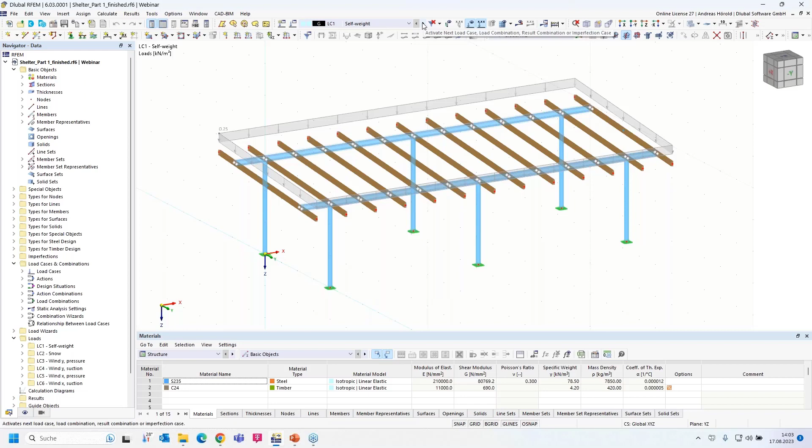Then I open the program. That's the state from the first part of the webinar that we presented last week. I created this model and the different load cases: self-weight, snow, 2 wind load cases in Y direction and 2 wind load cases in X direction. I go back to the base data, what we selected last week.

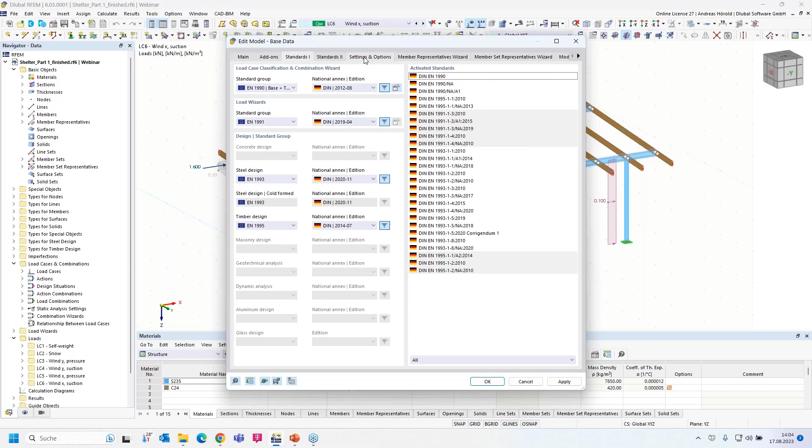I activated the 2 add-ons, one for steel design and one for the timber design. Also, the combination wizards are checked, and I selected the different Eurocode standards with the German National Annex. And under settings and options, I activated the member representatives and the member set representatives.

I would like to design only one representative, for example, and all members that have got the same properties, the same length, for example, same cross-section, are collected in one representative, and I design only one of them. So then in the member representatives wizard, all steel and timber design properties are checked, and the same for the member set representatives. Okay, I'll leave the dialog and I start with applying the imperfections.

On the left side, you can see the navigator data and then the folder imperfections. At first I have to select or create an imperfection case. I can do that with a right click and then new imperfection case. The imperfection case collects the imperfections. After the creation of the imperfection case, I need to create the imperfections. The main advantage of the imperfection case is that you can create a group of imperfection cases. That's, for example, necessary for buckling design according to the GMNIA method.

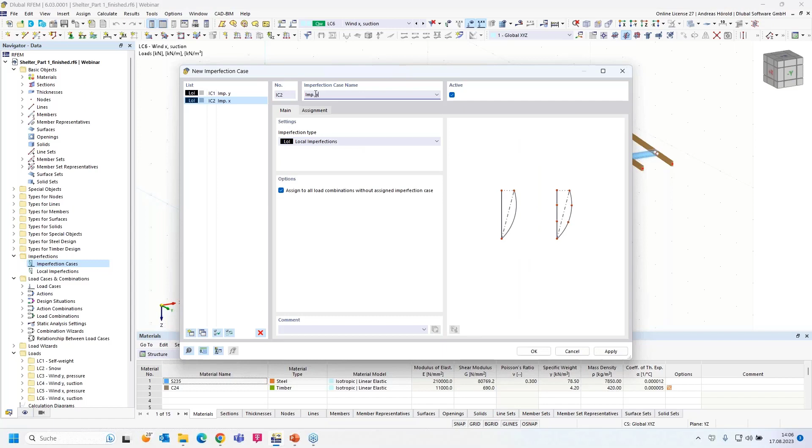So I create the imperfection case imp y and assign this imperfection case to the wind load cases 3 and 4, the two load cases with the same direction y. Then on the bottom left, I check create new imperfection case. I call it imp x and assign the wind load cases in x direction.

And you can see in the combinations, in the background, the combinations are created automatically, and you see only the combinations with wind load cases 5 and 6, and not with load cases 3 and 4 anymore. You can check that here. Same for imperfection y. You can't see any combination with the wind load cases 5 and 6. Only with 3 and 4, and of course the other load cases, load case 1 and load case 2, the snow load case.

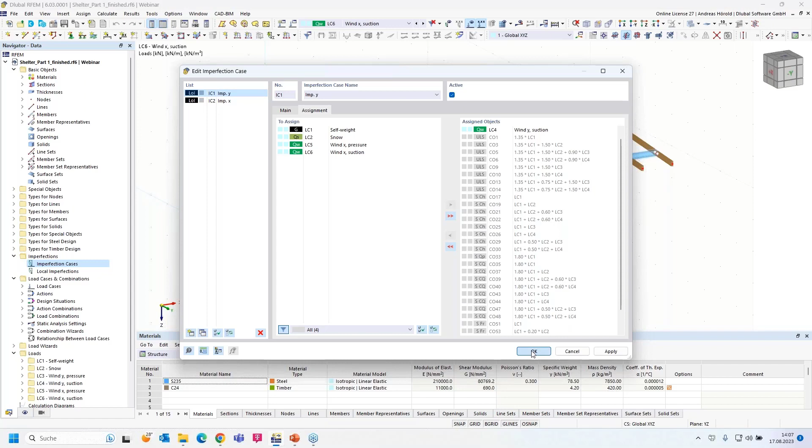Okay, I leave the dialog, and then if I go to the navigator data, I can open the local imperfections, and for example under the folder imp y, I can create a new member imperfection. With a right click on it, I can select new member imperfection. The other way is to go above here and select the button new member imperfection.

So the right imperfection case is selected. I would like to create an initial sway. I would like to assign the initial sway to the steel columns, and I will use for the steel design the equivalent member method in combination with imperfections and calculation according to second order theory. That's sufficient for the design according to the equivalent member method.

Okay, this definition type, Eurocode 3. So the coordinate system is local. Okay, I forgot to show the member axis systems. I select Y. I know that from the test. So then I measure the structure height. Measure. I measure the longer column. Doesn't matter that this column is a little bit shorter.

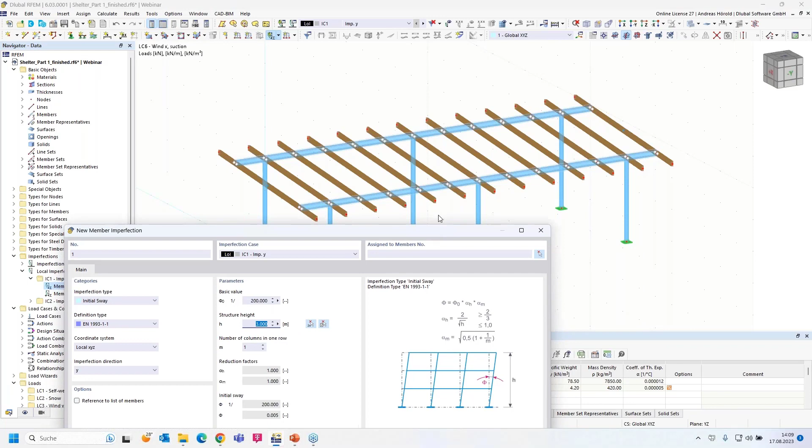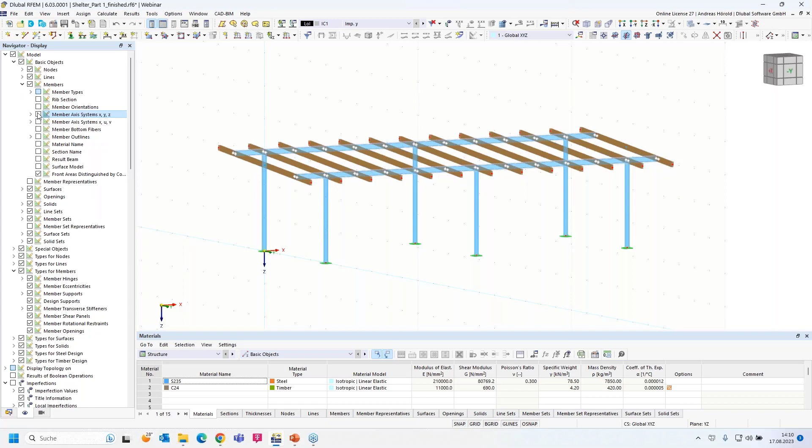2 columns should be in one row. This one and this one. And I can press OK. And I need to select the different... Okay, I must go in the dialog again. But before I do that, I go in the navigator display. And then under members, you can find the member axis system. So now you can see the local member axis system.

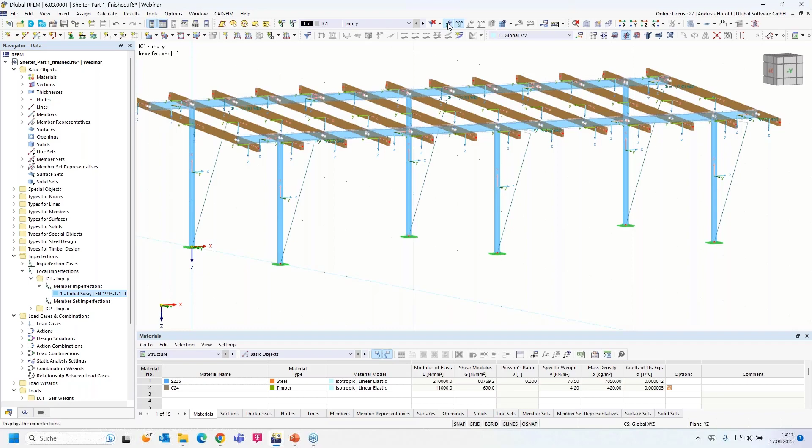And now I turn back to the navigator data, double click on the initial sway, and you can see the local Y direction is the same as the global Y direction. So I assign the different columns. Okay. And I have to select this button above, show imperfections. So the imperfections are created correctly.

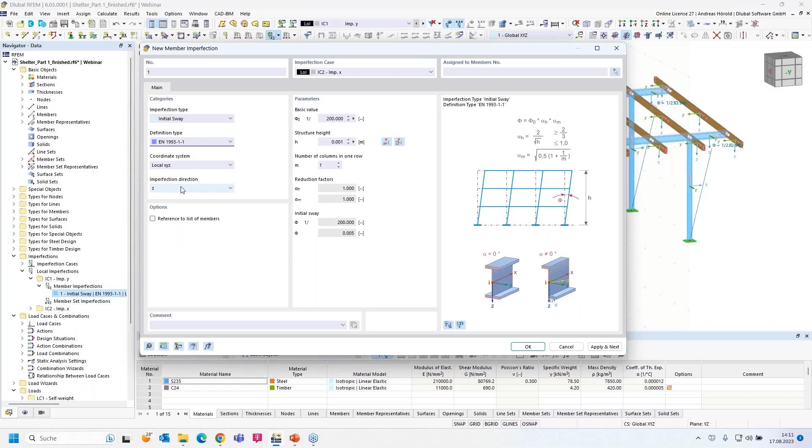So then the next imperfection, new member imperfection. This time I have to select the imperfection case 2, imp x. Again, initial sway according to Eurocode 3. This time imperfection direction Z. You can see this is the local Z direction. It's the same direction as the global X direction. Structure height is 3 and 3 columns in one row. Okay. And I select the different columns. So I select the other imperfection case, and you can see that the imperfections are defined correctly.

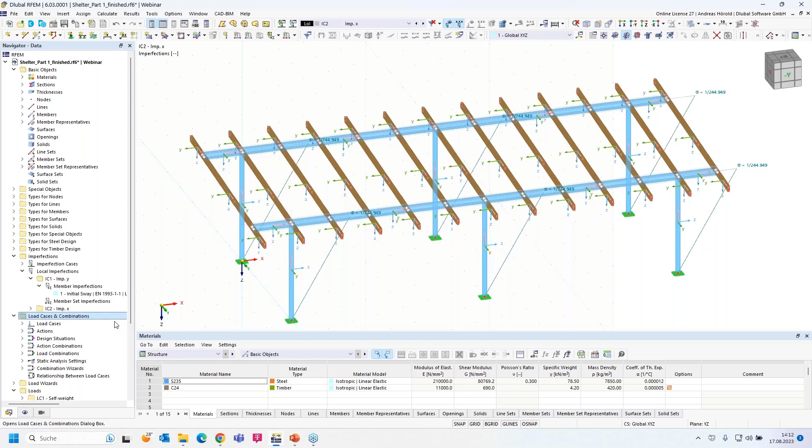Okay, then we can turn to the load cases and combinations. Here on the left side, navigator data, I right click on it and open the load cases and combinations. That's what we defined in the base data, the Eurocode 0 and the German National Annex, and of course the base and timber, because parts of the construction are from timber. And when I edit the parameters of the National Annex, I can see the KDEF factor. It's the service class 2 and it's 0.8.

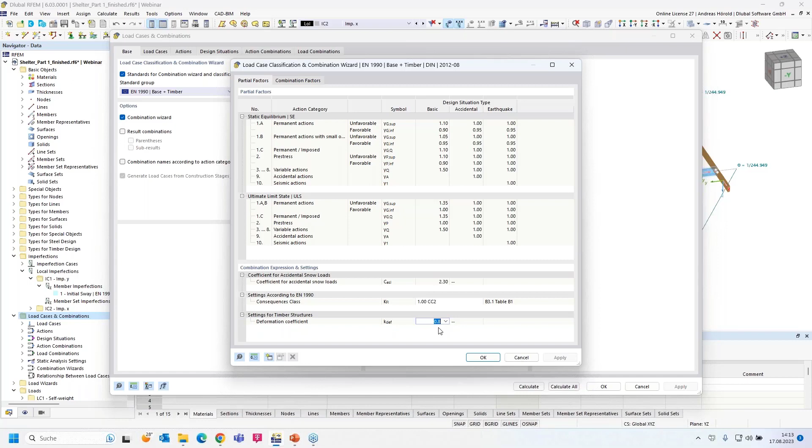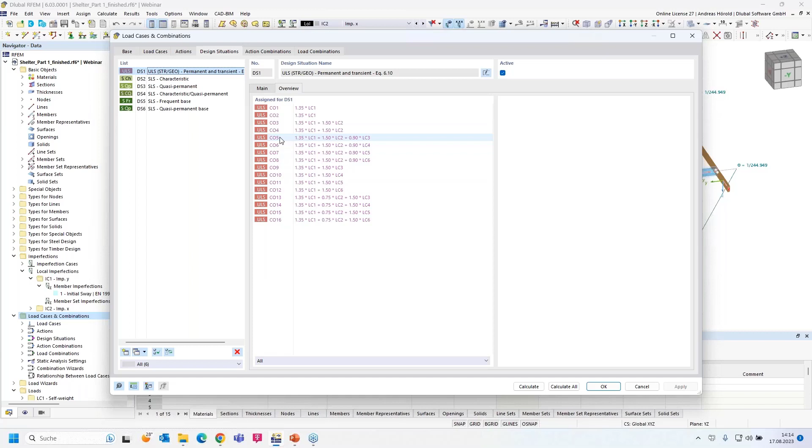Okay. So the combination wizard is activated. Those are our load cases in the next dialog. Then the actions. For the wind load cases, it's important that the alternative action type is activated. It's done automatically. You can see the 4 different wind load cases, so that we don't have more than one wind load case in one load combination. Then the design situations, 1 for the ultimate limit state design and 5 for the serviceability limit state design. If you click on one of them, you can go to the overview and see the different assigned load combinations.

And in this dialog, you activate the add-ons. You can also assign concrete design. We activate, for example, for the ultimate limit state design, the steel design and timber design add-on. Let's go to the action combinations. And the important thing, the load combinations for ultimate limit state design and serviceability limit state design. At the moment, we have got 60 load combinations. Let's go back to the design situations. Of course, we will activate the steel and timber design for the ultimate limit state design. For design situation number 2, the serviceability limit state design characteristic, we also activate steel design and timber design. That's all for the steel design.

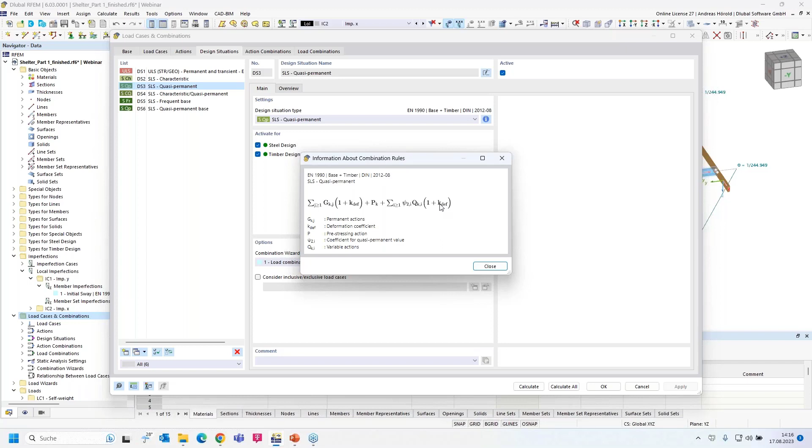And we check if we need this serviceability limit state design quasi-permanent for the timber design. I go to the info button, and in the combination rules you can see the KDEF factor, which is quite important for the timber combinations. That's why we need this design situation for the timber design. You can leave the dialog, uncheck the steel design. We check the same for design situation number 4, information, and we can see the KDEF factor again. That's why we need it also for the timber design.

And we don't need it for the frequent base. And you can't see the kdef factor here. So that's why I delete these 2 design situations. Okay. So again, this design situation for both, design situation 3 for timber design, and 4 also for timber design. So with the Shift key, I select the 3 serviceability limit state design situations and check the geometrical linear analysis. And for the ultimate limit state design, the second order theory. Okay.

So now we go back to the load combinations, and you can see there are 45 load combinations. Let me check if all is correct. Yeah, all should be correct. So that's all for the combinations. I go back to the navigator data. I deselect the member axis systems, but I show the member representatives and the member set representatives. I hope you can see it.

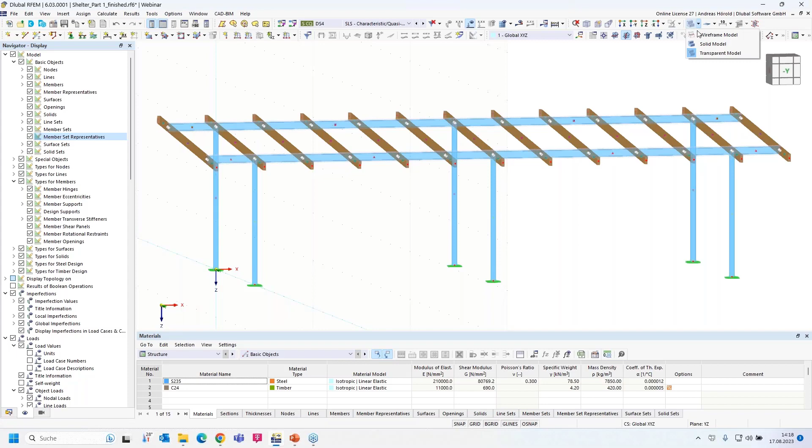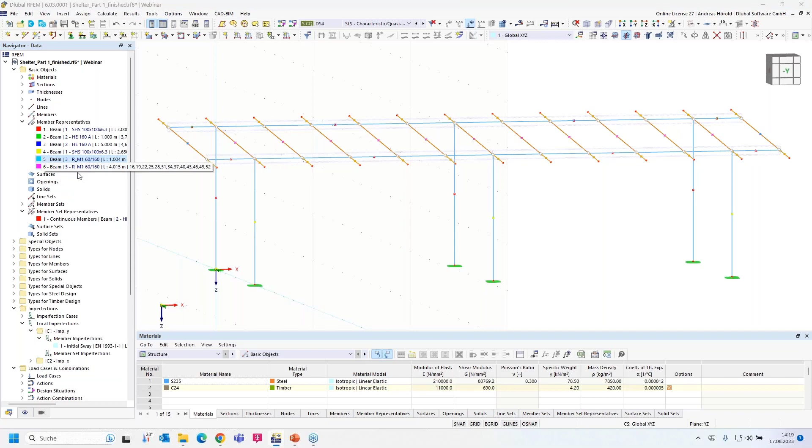I go right above to the wireframe model button. You can see these 3 columns are in the same group. It's the same member representative, and that's member representative number 4. You can see that in the different color of the points in the middle of the member. So I go left on the bottom in the navigator data to the member representatives and the member set representatives. So that's the timber representatives. You can see that's the cantilever beam, and that's the inner beam here. And I start with this inner beam made of timber.

Okay, then I go to the design type. You can see the service class number 1. That's not correct. I added the service class with that button and change the service class to moist. You can see this preview image. That's what is valid for our structure. You can see the timber structure on the outside, but there's a roof over the timber structure. That's the case for our structure.

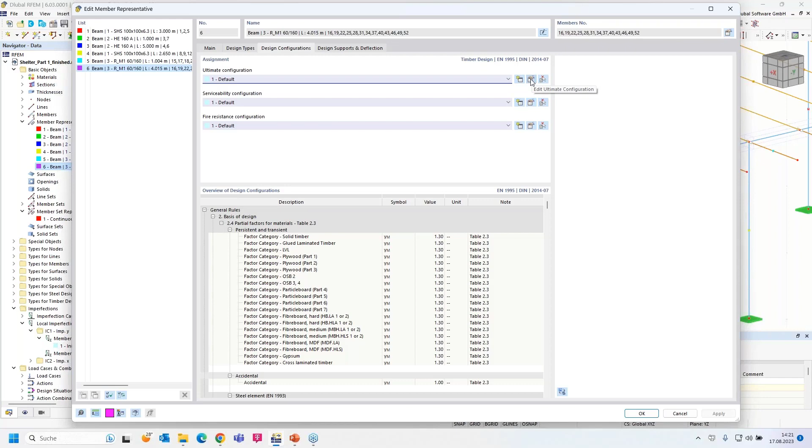Okay. I don't define any effective lengths. We don't do stability analysis for the timber beams. I assume that I've got nailed formwork of timber on the upper side of the purlins, or a stiff plate nailed on the upper side of the purlins. And it should be quite stiff. So I go to the design situation, ultimate configuration, select edit ultimate configuration, and I uncheck the stability analysis. Okay, and we leave the standard parameters. I apply with OK.

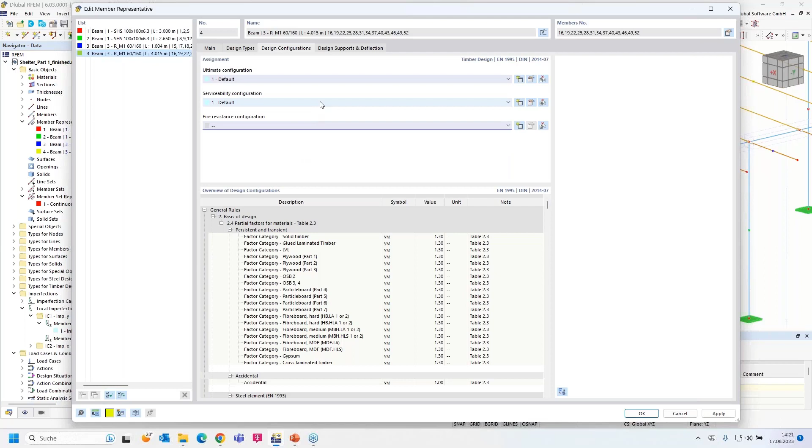So I go back to the design situation and serviceability configuration. I press the edit button, and I leave the parameters from the standard. Okay, and we don't perform any fire resistance design. So the next dialog is the design supports and deflection. Now I have to enter a support at the member start and the member end. I press this button, create new design support for member start. The type is timber.

Direct support. The support length is 160 millimeters. That's the width of the steel beam, the HEA 160. The support width is equal to the width of the timber member. If you change the width of the timber member later, it will be changed automatically. It's an inner support. We do the design only one time for this member and not for the cantilever beam. And we say it's an inner support, so the program uses the complete width of the support. In our case, the steel member.

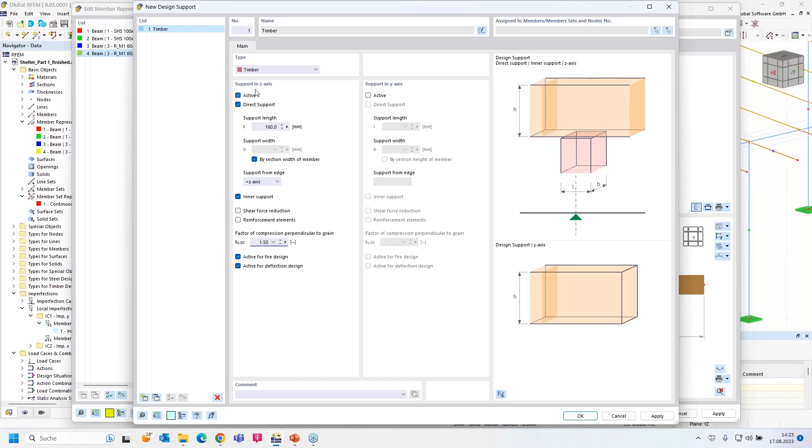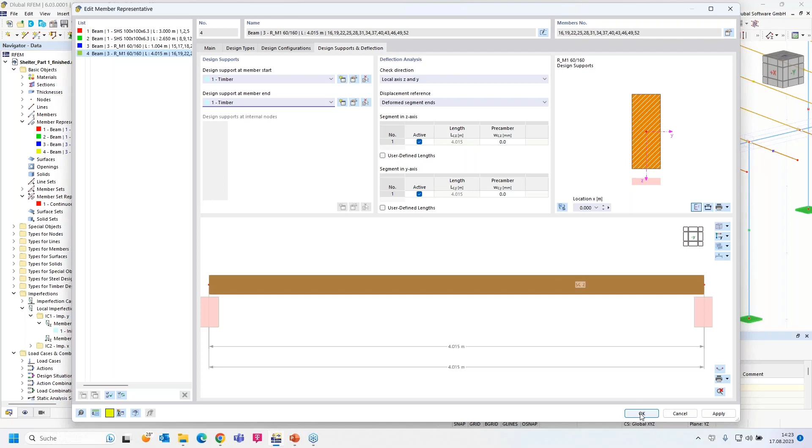So I need to define the factor of compression. I select 1.5 softwood discrete supports. Okay. So it's only supported in Z direction. So the design support should be at the member start and the member end. Okay, that should be all for the timber design, but I check beam number 3, the cantilever beam. Design types, the same service class, 2, the same design configurations, no fire resistance design, and we don't need to define any support. We design the support with the member representative 4. Okay, that's all for timber.

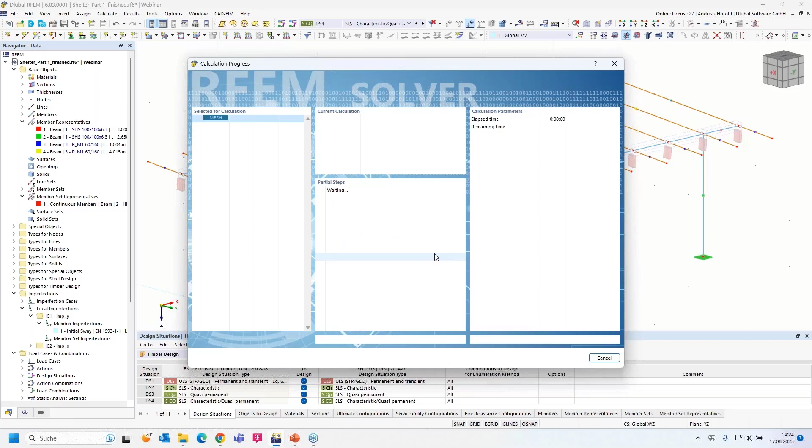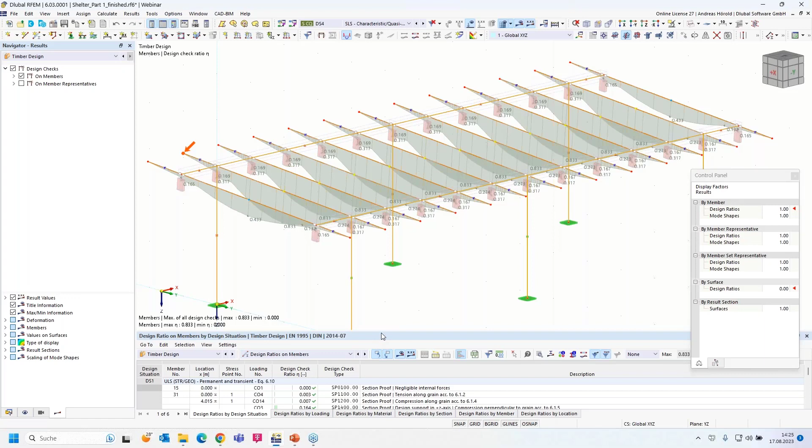I can run the calculation here in the table on the bottom, timber design. And I press this button, show results. And this runs the calculation. The program calculates all combinations simultaneously; it's a new feature in RFEM 6, a multi-core calculation. My computer has more than one core. That's why the combinations are calculated in parallel. So I show the design ratio on members. You can see the different design ratios.

68% for the serviceability limit state design. No, the maximum is 83 for the serviceability limit state design. If you double click on the line, a new table is opened. You can see the design formulas, also the equations from the standard.

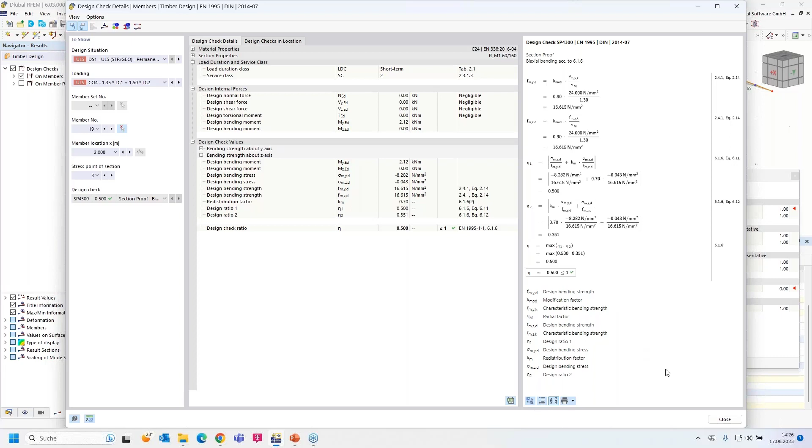Let me select another one, maybe a section proof, for example, this. I can double click on the line, or I can use that button, design check details, and you can see the equations from the standard. Complete design. And you can print it directly with that button, print graphics to printout report. A very nice new feature of RFEM 6, often wished from our customers, and we implemented it for RFEM 6.

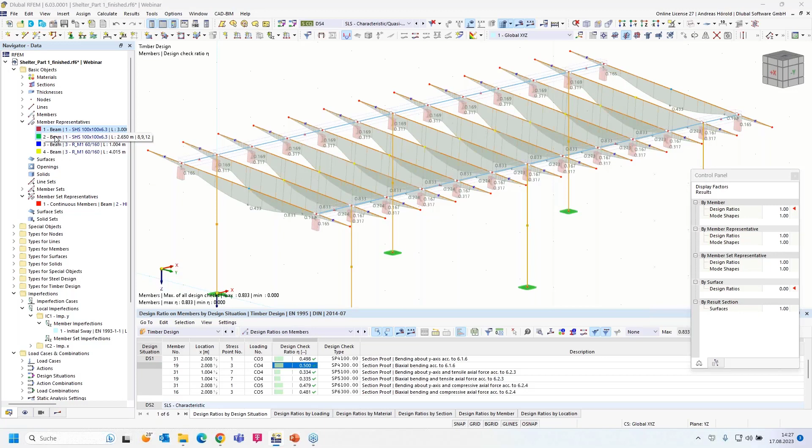So, okay, that's all for the timber design. We continue with the steel design. I select the member representatives 1 and 2 and do a right click, edit. Those are the columns. You can see them on the cross section. Design types. I select the effective lengths. As I already said, I will use the equivalent member method. That's why I have to create effective lengths.

Another way would be to use the general design method. Then you need to define boundary conditions. So I create a new effective length. All the flexural buckling and torsional buckling should be designed. I check all, and I leave the member lengths by 1. The effective length factors, SK, should be equal to the member lengths. Because I assigned imperfections and used the second order theory for the ultimate limit state design, that's sufficient if I leave the member lengths to 1. Okay.

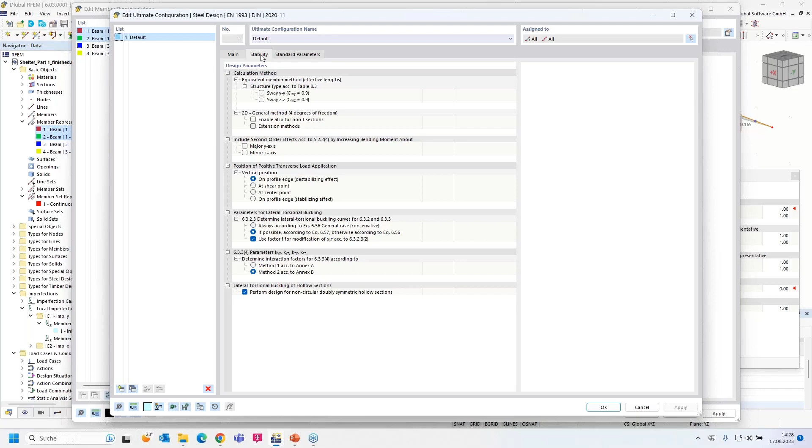So then design configuration, default. I go to the edit button. I perform a stability design and I leave all checks as they are. Apply with OK. Serviceability configurations, let me check it with the edit button. And I leave the standard parameters as they are. Okay. And I don't do a fire resistance design.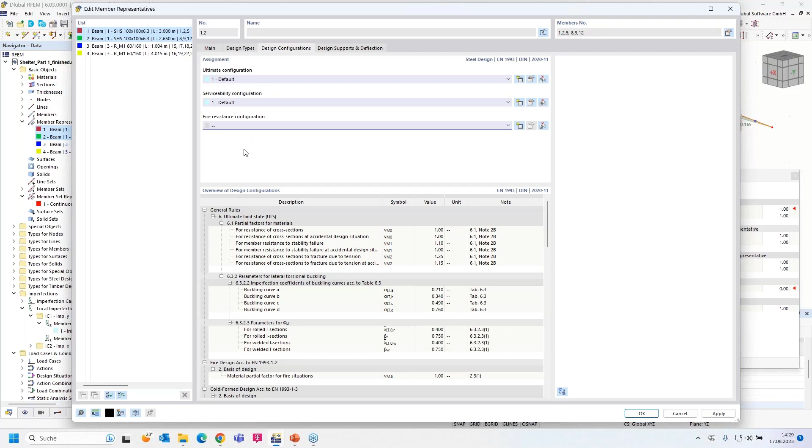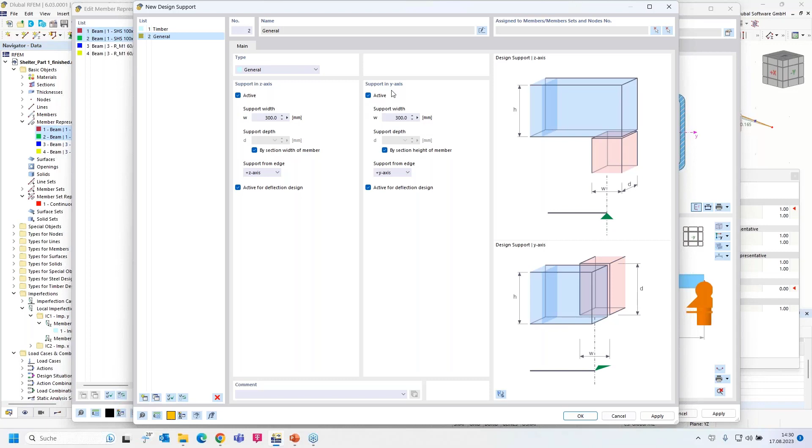So then design supports. I have to create a design support at the member start. I see it as a cantilever column, which is rigidly supported at the member start. So new design support, general support, and I leave all parameters as they are, but I select it for both directions, for the Z axis and the local Y axis. Okay, but only at the member start. You can see that in the preview. So that's all for the member representatives. You can leave the dialog.

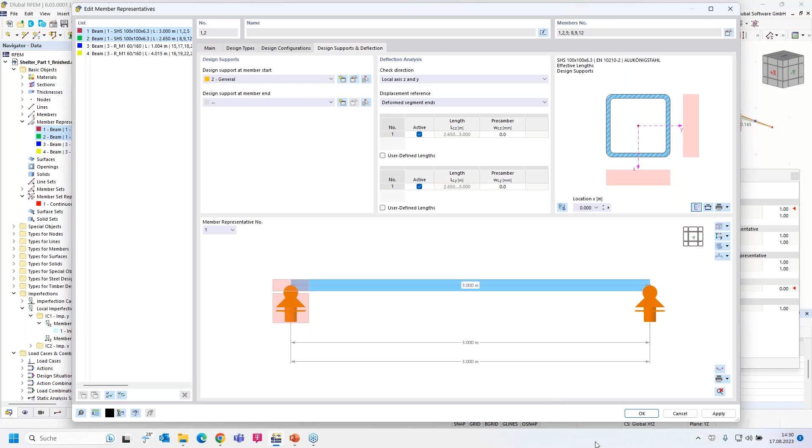All results are deleted. And I continue. I deselect the results. So I continue with the member set representatives. These two sets of members are contained. I double click on it, and I can see there are no design tabs here. I leave the dialog and I select the member sets, or they are selected. I double click on one and I have to set this check here, design properties. Now it would be also possible to enter here the design types, the design configurations, and so on. But I will use the member set representatives. I'll leave the dialog.

Double click on it. Select the design types. I will use the equivalent member method again. Create a new effective length. Nodal supports and effective lengths. So, with this button, I select one set of members. And I can see there are only 3 inner nodes. And that's not correct. I leave the dialog. Okay, I can see only 3 nodes. We check why.

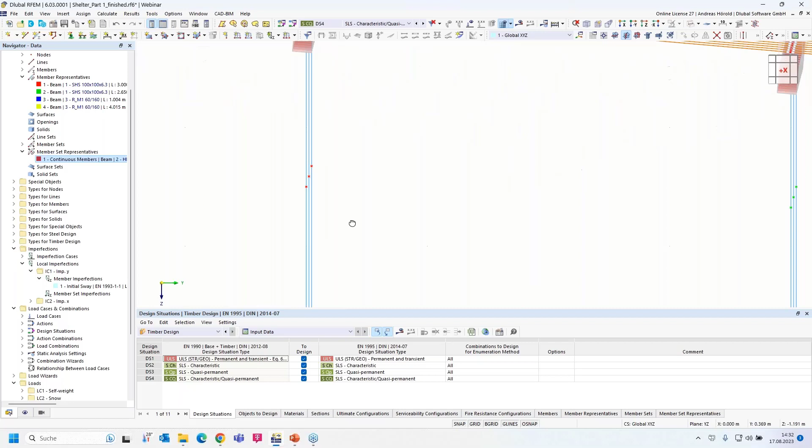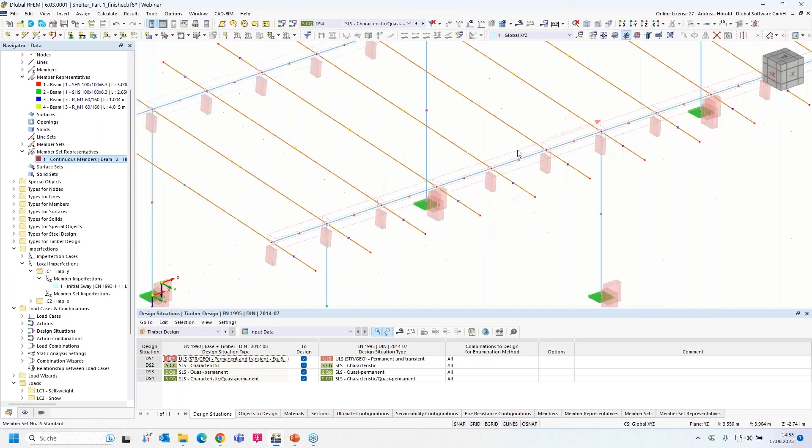As I copied the purlin in the first part of the webinar, the member wasn't divided, and now this node is missing for my set of members. So I'll correct that. I use this function here right above, connect selected lines, members, and so on. I select it. Okay. And select this member and this member. Okay. And now the member is divided. There are only members with a length of 1 meter, but the member set is still the whole beam, all the beams are collected in one member set. Same on the other side.

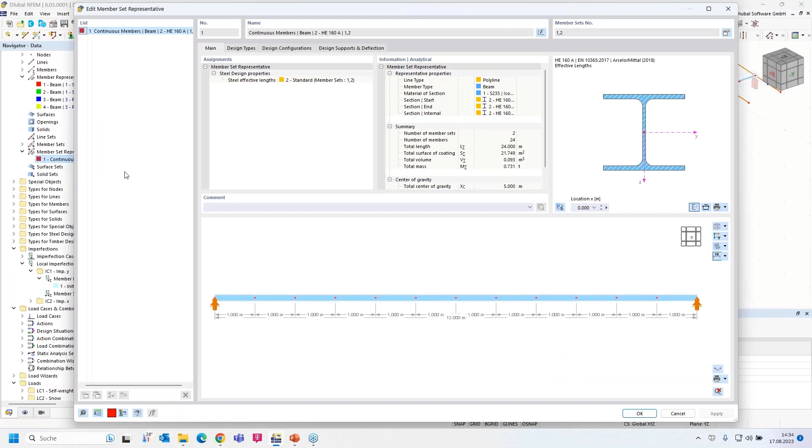Okay, I turn back to the member set representative, double click on it. I turn to the design types, and I edit the effective length.

Click on one member set again. So now our inner supports are here. I can open the preview here on the bottom. You can see the 2 member sets. And now I can select more than 1 node and assign the different support directions and so on.

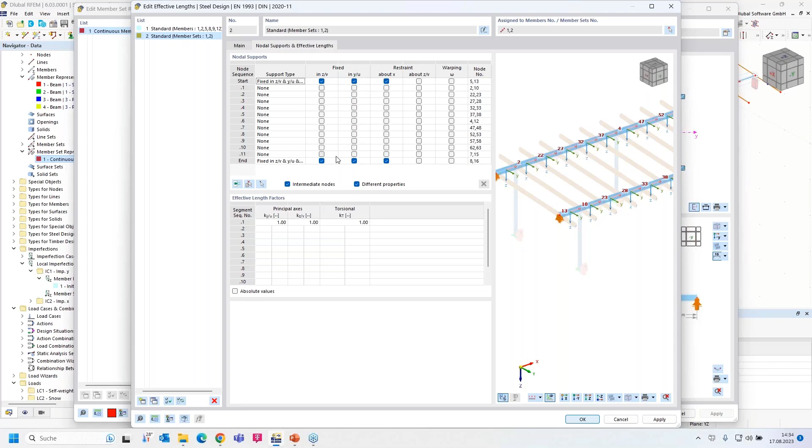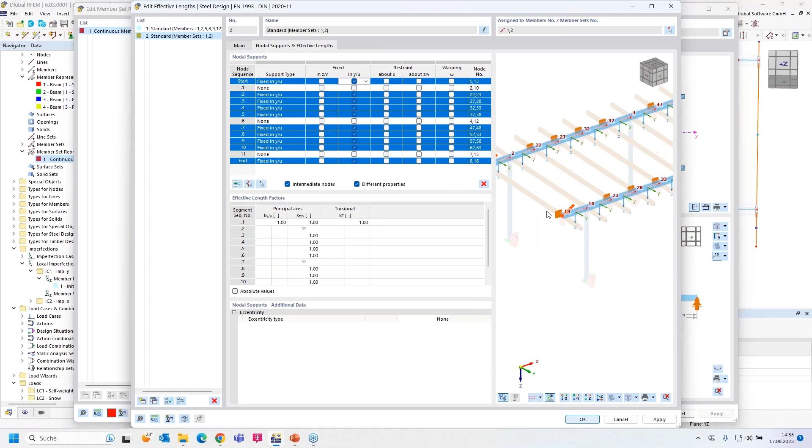So I can use that button, select nodes. I do that for only 1 set of members. So this node, these inner nodes, these inner nodes, and this node. Okay, all are selected, and I check only the support in Y direction. You can see in the preview that this is okay.

And now I use this function again, select nodes. I select this node over the column, the 3 nodes over the columns. Okay, it should be fixed in Z, Y direction and about the X-axis. Should be a fork support.

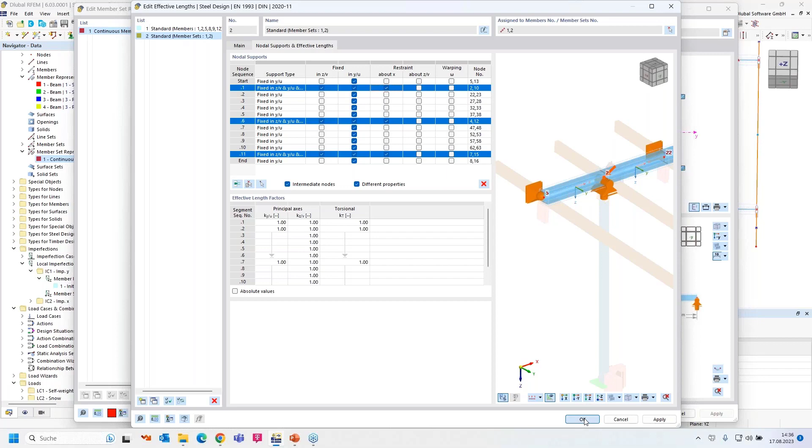So, and now all is correct for both sets of members. And we collected in one member representative. I can leave the dialog with OK. And you can see in the preview again that all is defined correctly. So then design configurations. Yeah, we leave the same configurations for the ultimate limit state design and for the serviceability limit state design, and we don't perform any fire resistance design.

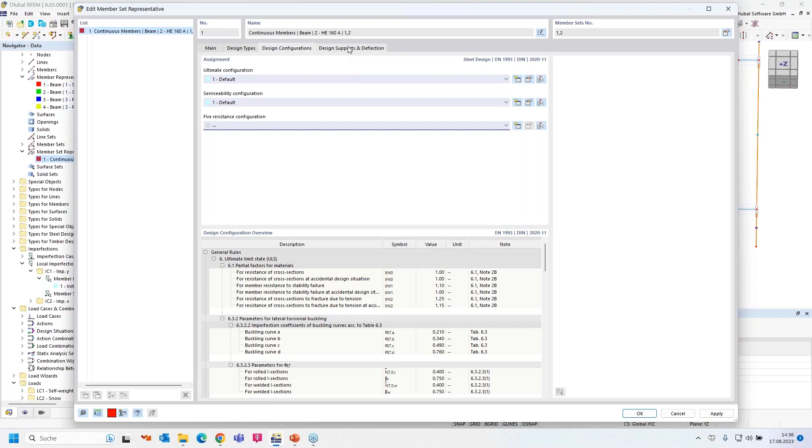Okay, then we have to define supports or design supports. At this point, use the general design support in this point over the column and in this node over the column. And we check the direction. The serviceability limit state design should be performed only in Z-axis, because we have the stiff purlins and plates on the upper side of the cross section.

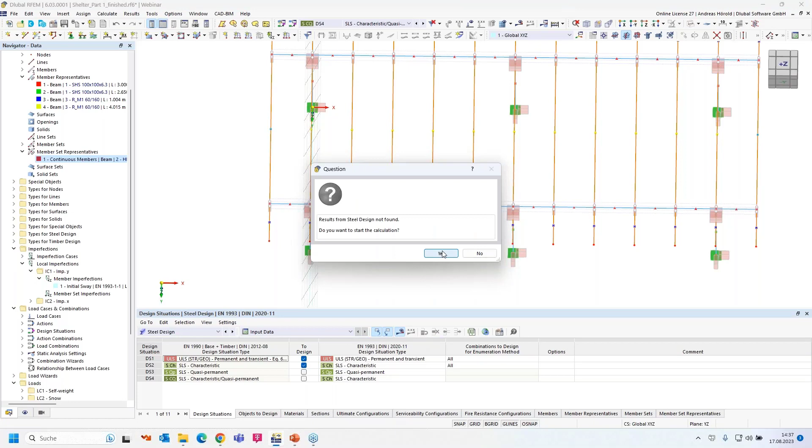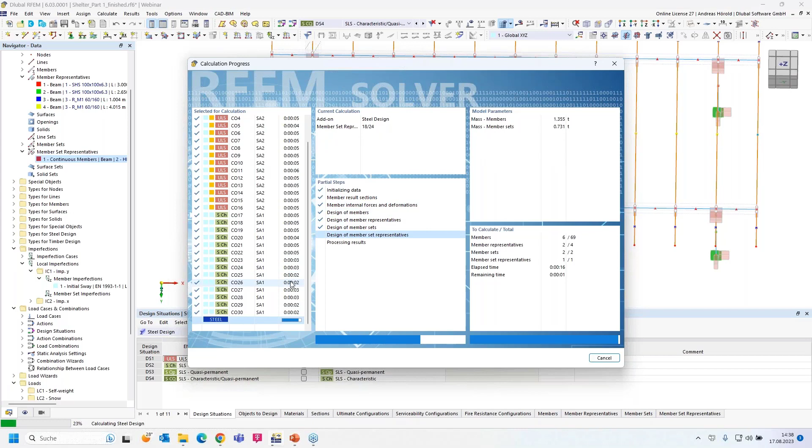Okay, that's all. We can leave the dialog and run the steel design calculation. Press this button here on the table. Okay. All load combinations need to be calculated again, but with the multi-core calculation, that's no problem. Okay. Now you can see our results for the steel design.

Let's go to the table, design ratios on members. So the maximum value is 49%. Yeah, it's the deflection in Y direction, global Y direction for the column. Okay, so let's select design ratios. Oh, just a moment. Design ratio on members, it's okay. By cross section, let me check. I can do that with the member representatives. Design ratios by section. That's the column.

Okay, and member set representatives by section. That's the horizontal beam, and you can see the maximum design ratio. It's about 25%. I think a smaller cross section is sufficient. Let me go back to the navigator data. You can see the sections here. And I can right click on the HEA 160 and edit it. Now with that button, I go to the library, then standardized I-beams, H-beams, and then HE 120A should be sufficient.

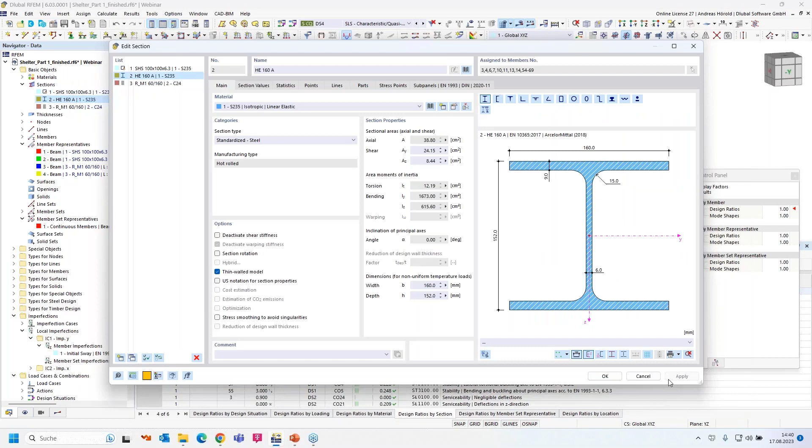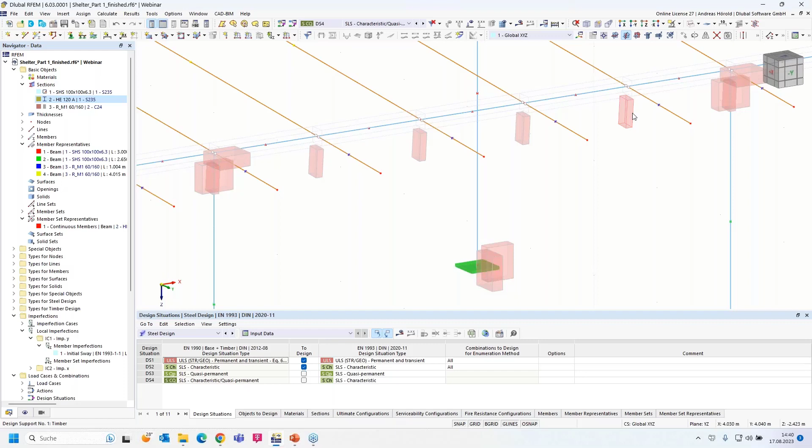So that's all, but you need to consider that we need to modify the design support, because the support length isn't 160 millimeters anymore. Now we have got 120 millimeters. And it's now correct for all design supports. Okay, then we run the calculation again. With that button, you can run all calculations, the load combinations, design situations, and the steel and timber design in our case.

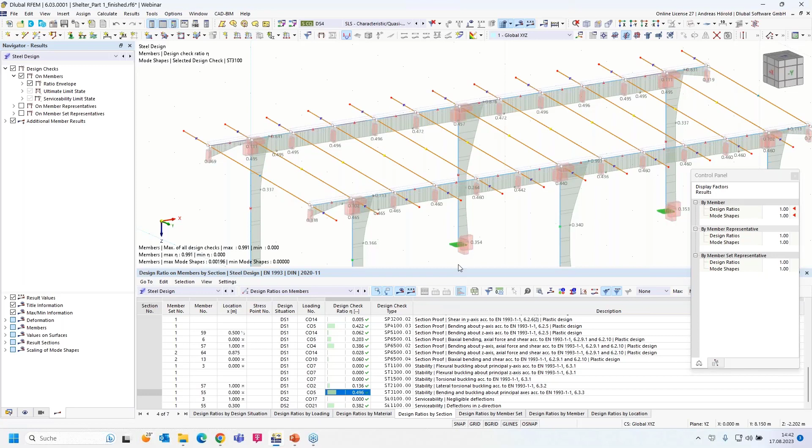So then let's check the design ratios. Steel design. Here, design ratios by section. The column, almost 100% for the serviceability limit state design, and the horizontal beam has got a design ratio of almost 50%. Maybe we can optimize not the column, but the horizontal beam, but I leave the construction as it is. So, okay, that's all for the design.

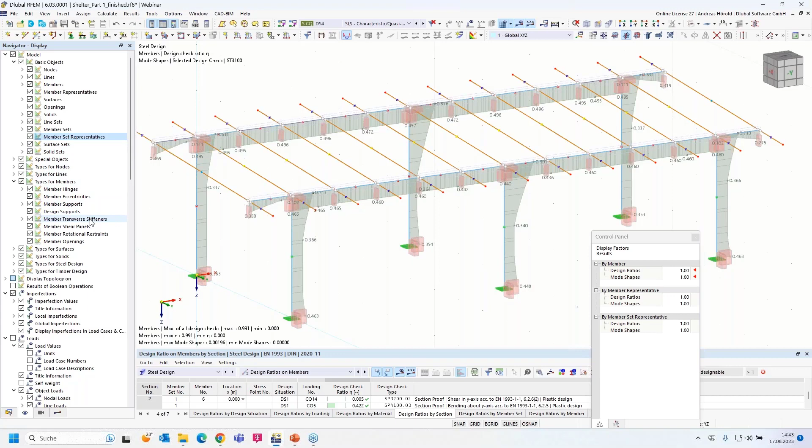Now we will create a printout report. At first, I would like to print the steel design graphic and the timber design graphic in the printout report directly. Let me switch off the design supports. I turn to the navigator display. And sometimes you can't find any part of your structure if you want to deactivate it or to disable it. Then I have got a tip.

When you do a right click, for example, on the design support, then you check the display properties. Those are the properties for the design support. But what I need is the structure of the folders. Where can I find the design supports? And you can see you can find it under the types for members. And it has got nearly the same structure as in the navigator display. You can leave the dialog, types for members, and you can see the design supports, and I can uncheck it.

So, okay, let me print this graphic. Left above, you can find this button. You can print the graphics directly to the printer, to a PDF, or to a 3D PDF. I use the function print graphics to printout report.

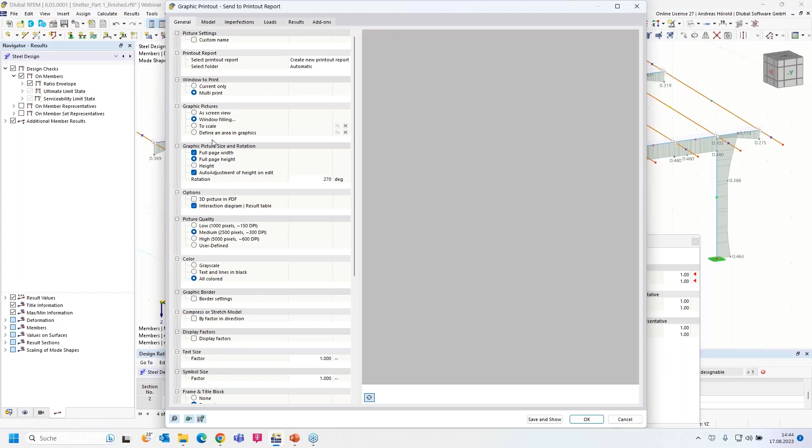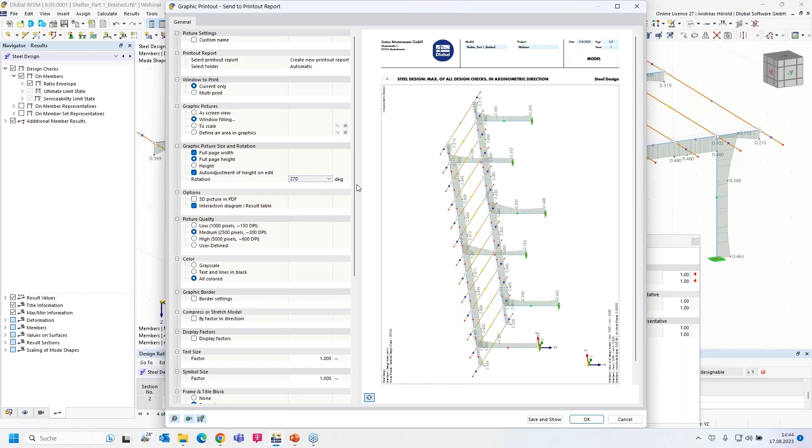I check current only. It's already rotated. That's 0 degrees. And I would like to rotate it clockwise 270 degrees. Okay. I press OK.

And now the printout report manager was opened. I have to enter a name, printout report 1, and can check the different report items. Let me go through them. I leave the first entries. Maybe we check the loads for the different load cases.

That's quite new in RFEM 6, the parts list. Let me print some parts lists. So we leave the static analysis results. Then there's the folder for the steel design. Let me increase the window. That's also a new feature of RFEM 6.

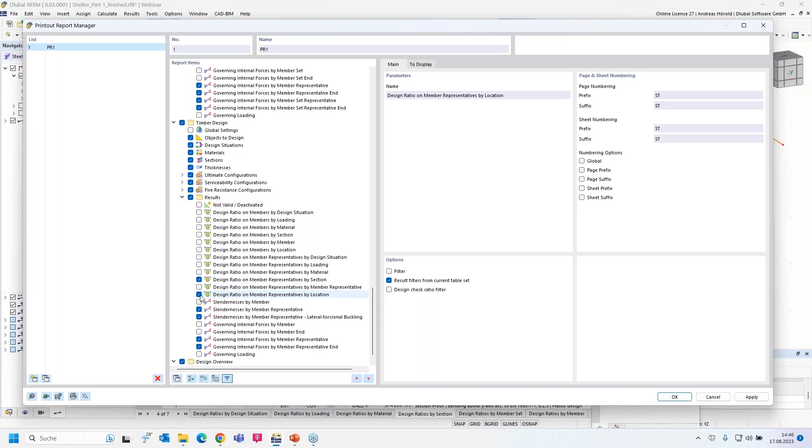So, I would like to print only the design ratio on representatives by section. So I uncheck the others. Okay. And design ratio on member set representatives by section. Then timber design, the same. Design ratio on member representatives by section. That's sufficient.

Okay, we can leave the dialog. We don't open the printout report; parts of it were created. We print the next graphic manually. Here, timber design, left above, and the navigator results. The ratio envelope. So I move it a little bit and go above to print graphics to printout report. Same workflow, same rotation.

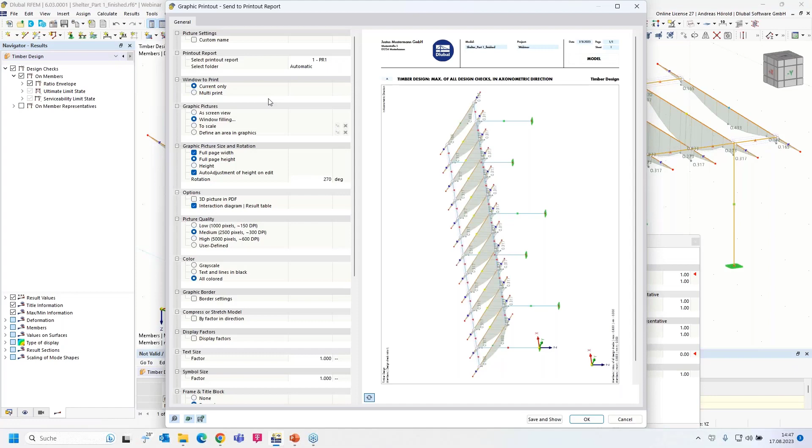Okay. And now we would like to use the isometric view for a multi-print. I select print graphics to printout report again. And I select the option multi-print. And now you can see different dialogs on the top. Model. We would like to print the isometric view of the model, the current view. Then imperfections. I select them all, meaning 2 imperfections, the current view.

Loads. Not all items. I select the 6 load cases. Okay. Current view. You can also check other views, in our case without imperfections. That's also only an example. You can print what you want, but I would like to show you how you can print several graphics in one step.

So load cases and combinations. I select only the design situation number 1. I'll remove the load case with that button, and I select the design situation number 1. Okay. Current view. Members, internal forces, only as an example, N, V, and M graphics. Okay.

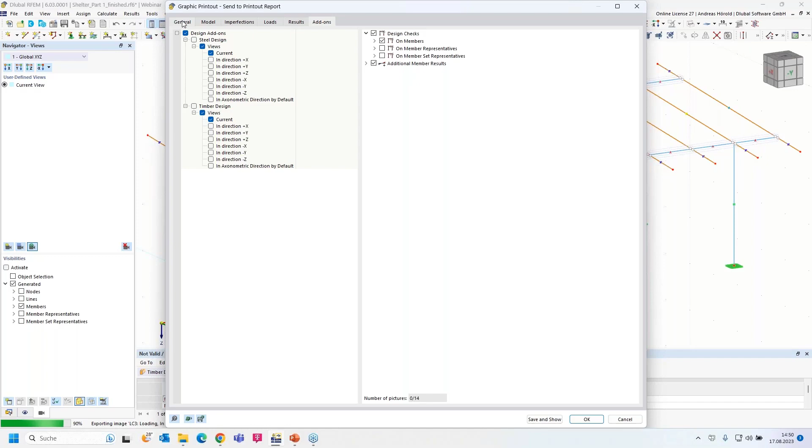Now we don't print the add-on graphics. I printed only the 2 add-on graphics manually. And we can see on the bottom that there are 14 graphics. Now if I go back to the general view, you can see the previews of the different pages, the model, imperfections, and the loads.

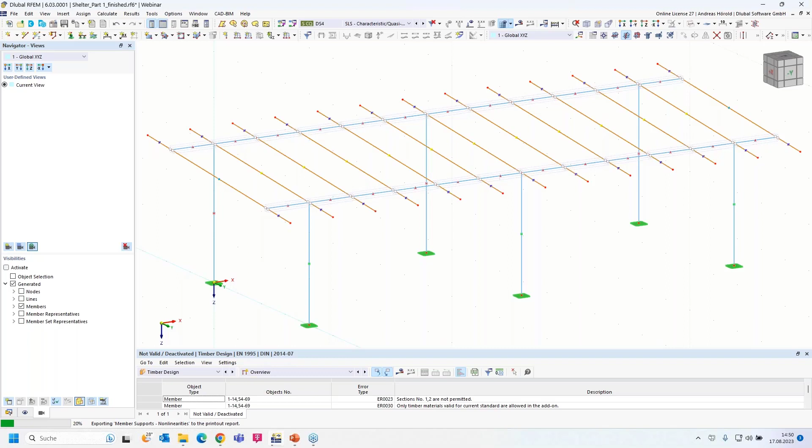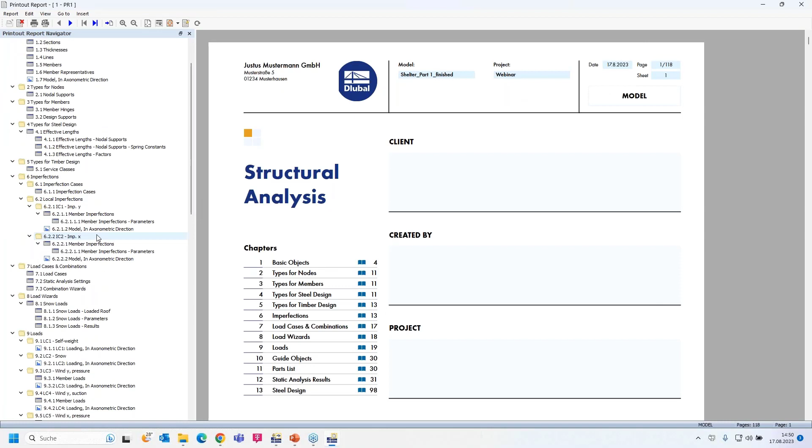Okay, now I press save and show, and the printout report with all graphics is created in some seconds. Okay, that's the printout report. An important new feature is that you can work in the printout report and in the model in parallel. I can show that like this on one screen. An important new feature. And let me show the different graphics.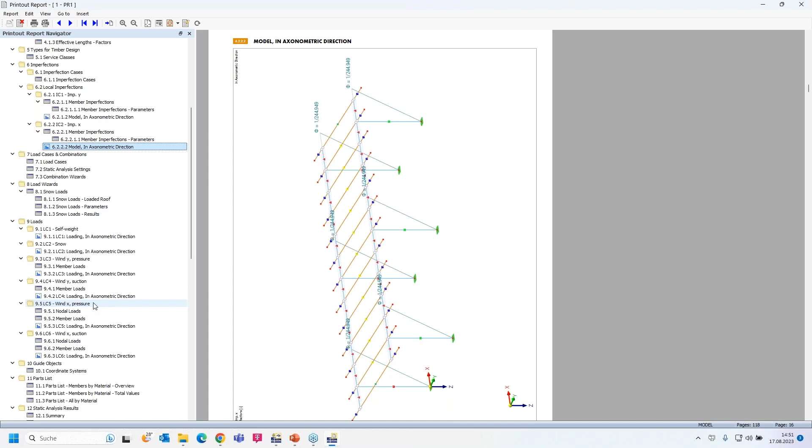They are in the right place: the model under the base data folder, then the imperfection graphic under the imperfection case and under the local imperfections. Okay. Then the different load cases under the loads. Then under static analysis results, you can see the different graphics, N, V, and M.

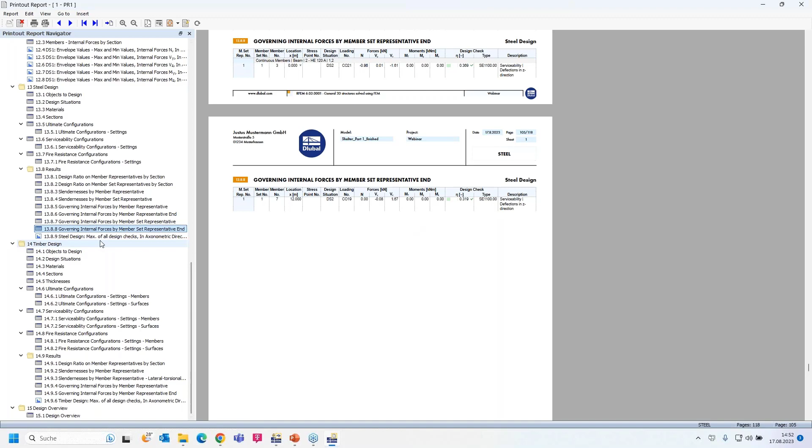And under the folder timber design, for example, you can see the timber design graphic. And I skipped the steel design. That's the graphic for the steel design. Before the graphic, you can see the tables with the results of the design.

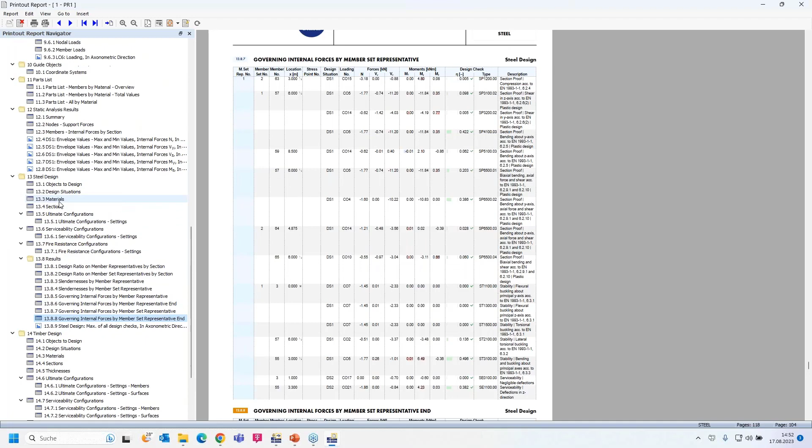Okay, let me show you the parts list. Parts list member by material overview. This graphic. I can zoom in a little bit with the control key and the mouse wheel, for example, or with the buttons above. Zoom out and zoom in. That's all okay.

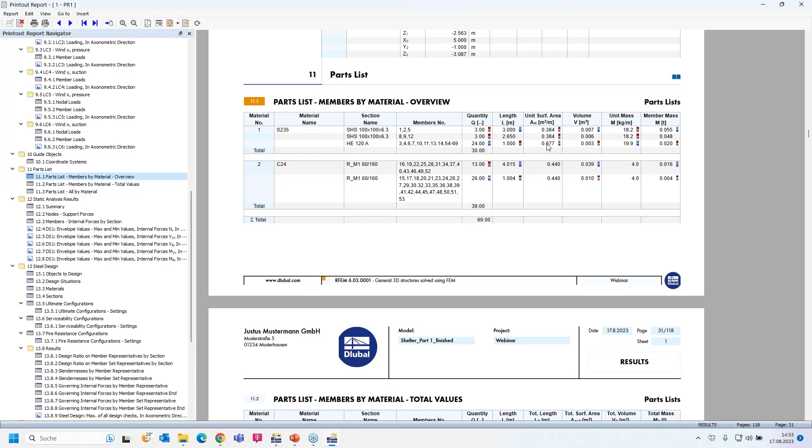And you can see the different lengths of the members, the sum of the steel parts and the timber parts, and the sum of all the unit surface area, for example, and the unit mass, and so on. Okay.

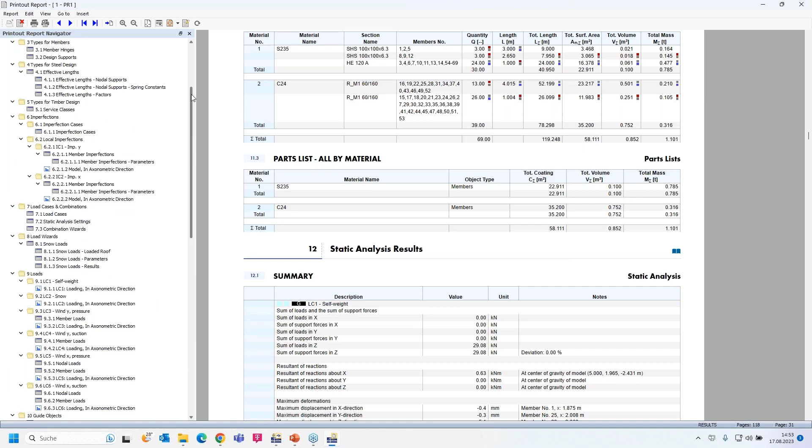So then let me turn back to the cover. It's the start of the printout report. You can modify the cover, you can enter a client and so on. I right click in the menu here, press edit. You can select the preview image, or deselect it. I enter a client,

John Doe, created by me, Harold, and the project, we call it roof on market.

So, okay. That should be all, or we don't call it roof, we call it shelter. Shelter on market, okay. So then you've got other settings. For example, you can enter your company name here. You can upload a logo. That's the Dlubal logo. And do a page setup, printer settings, and so on. Okay, that should be all. I leave the dialog. Okay, the value from my printer is not enough. That should be okay.

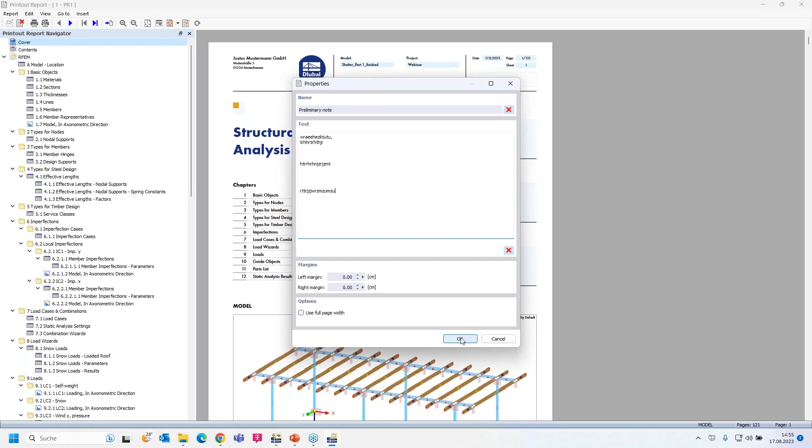And it's added at the end of the printout report. You can see the preliminary notes. So I moved the item to the document start. So that's the content, and you can see the preliminary notes here. Okay, let me go back to it. So you can enter properties, so you can change the text anytime.

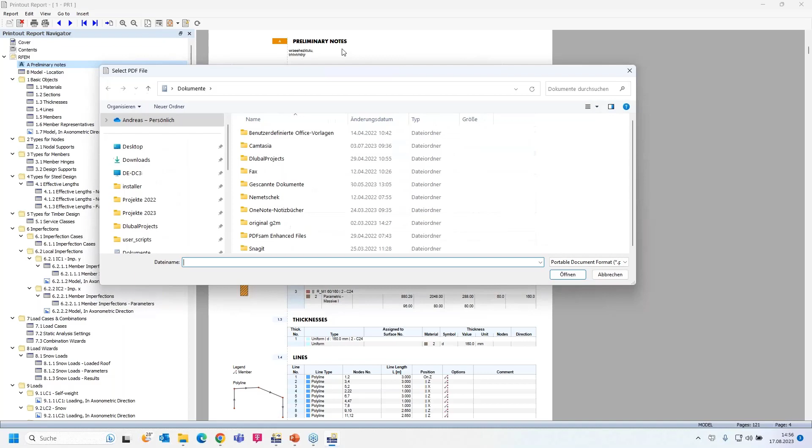Then I insert a PDF. So from my desktop, I prepared a PDF from our GeoZone tool. I think you know that from our website. I can enter all pages or a selection of the different pages. So I press the OK button, and then the PDF has been added at the end of the printout report. I can move that, for example, also with drag and drop. Let me do that. I close these folders and I move the PDF before the load wizards.

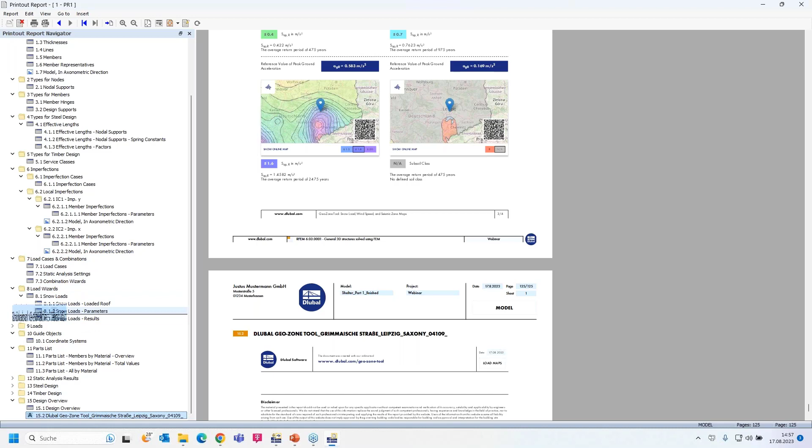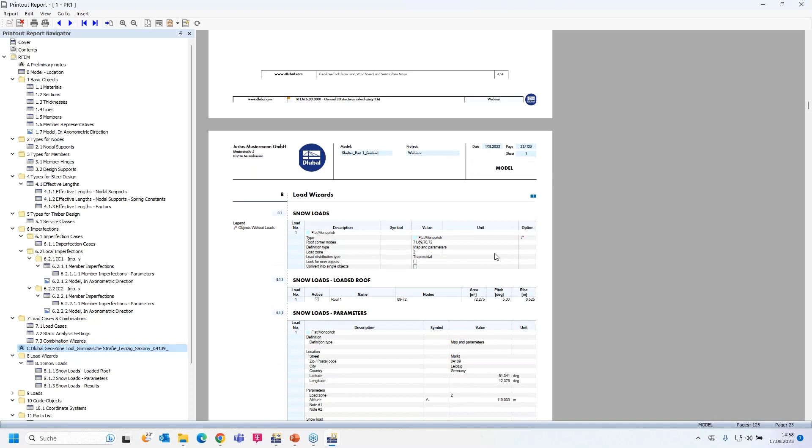Okay. So now you can see the PDF here. And then the load wizards follows, now also with the location and so on. Then edit. That's also quite important. You can set a language. The program can translate the printout report in 10 different languages. It takes only some seconds to translate such a printout report, for example, in French, Spanish, German, etc.

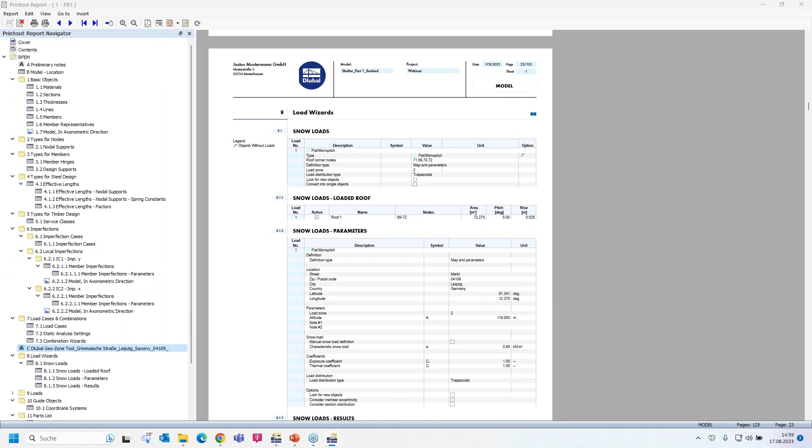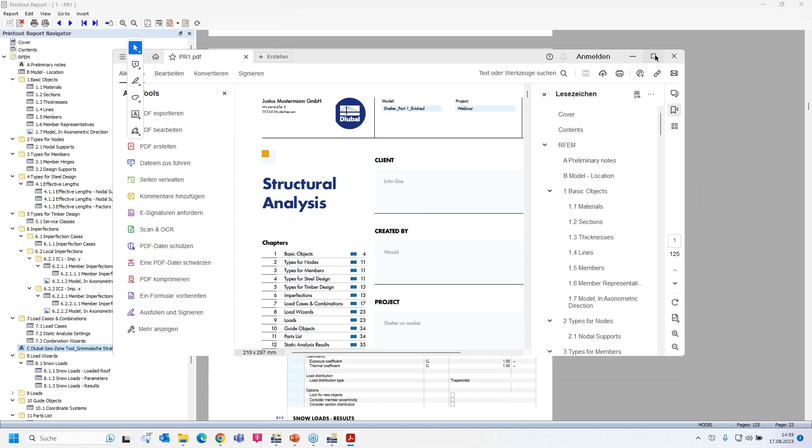Then report. You can print the printout report directly, or export it to PDF or to HTML. Let me export it to PDF to my desktop, PR1, printout report 1. I save it. The PDF is creating, and I open it. You can jump between the different chapters on the right side. All tables and sheets and graphics are printed in the PDF. Okay, that should be all for the presentation.